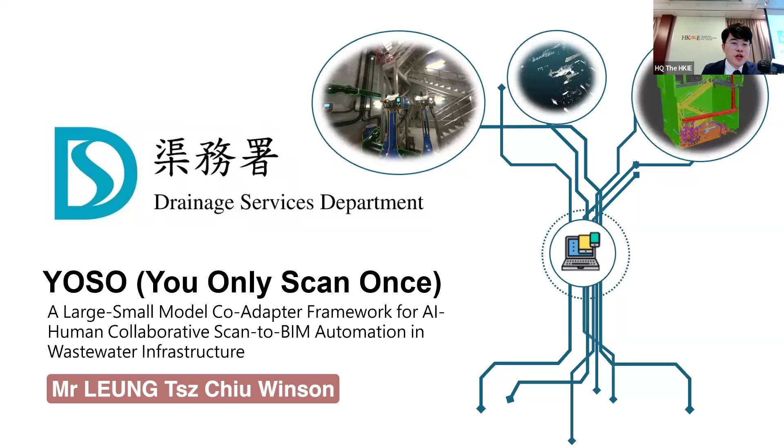So, good evening, everyone. I'm Winson Leung, an electrical and mechanical engineer from the Drainage Services Department. It is my honor today to introduce our innovative framework, YOSO, which stands for You Only Scan Once. It is a large small model co-adapter framework for AI-human collaborative scan-to-BIM automation in wastewater infrastructure.

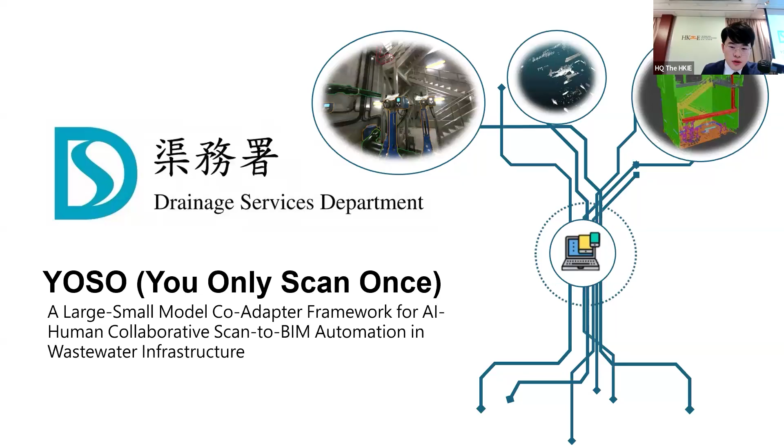Today's agenda will be divided into mainly 4 sessions. First, I will briefly introduce the background and the motivation behind this research, together with some insights from the literature review. Then I will explain the methodology, how we developed YOSO, and the key technologies involved. Then I will present the results and some findings from our field application, and finally the conclusions.

Why is DSD so interested in BIM development? In fact, DSD manages an extensive sewage network and drainage system of over 4,800 kilometers in Hong Kong. We also manage more than 370 plants across Hong Kong. Managing such a vast and complex system requires tremendous resources and manpower, so improving efficiency is one of the top priorities of our work.

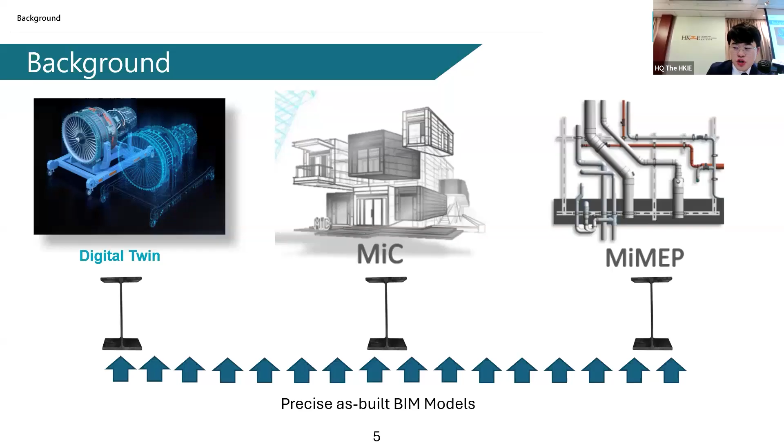To enhance efficiency, we have explored different approaches, for example MIC or MiMEP to facilitate our replacement and upgrading works. More recently, we also introduced digital twin technologies to enhance our operation and asset management efficiency. But all these technologies share the same thing: they all rely on BIM models. Yet producing these precise BIM models is often time-consuming and heavily relies on manual work.

Once segmentation is completed, the grouped points are connected together to form a mesh model, representing the shape and surface of each object. Finally, we enrich the model by adding attributes to transform it into a real BIM model. To sum up, while the Scan-to-BIM workflow is effective, its main bottleneck lies in the manual segmentation part.

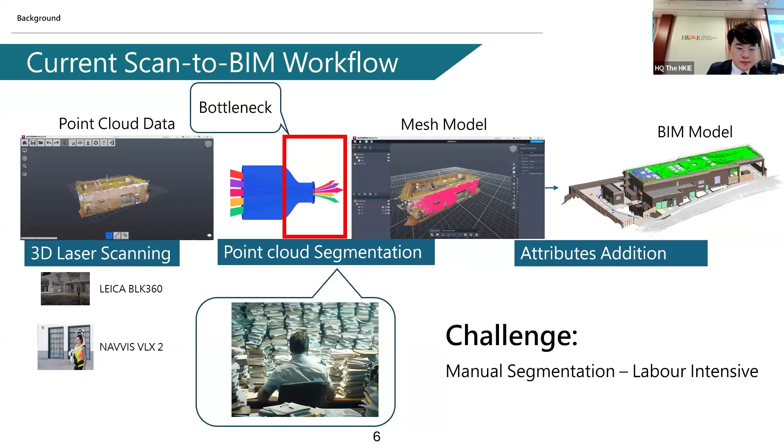Second, the workflow is fragmented. Current research focuses on the AI algorithm and lacks a seamless end-to-end workflow, making it difficult to scale and automate in practice. Third, many of these models are not adaptive. For common objects like chairs or tables, there are millions of open sources on the internet available for training. But for our domain, with limited datasets, the model must be continually refined and updated with real domain-specific data to maintain accuracy and performance.

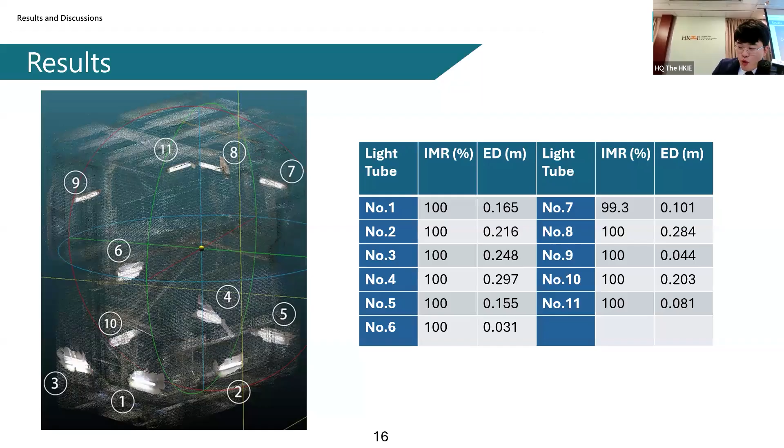Based on these two metrics, we now present the YOSO results. The left-hand side image displays the BIM model of the light tubes generated by the YOSO framework, while the table on the right-hand side presents the corresponding analysis results based on the IMR and ED metrics. As shown, all 11 light tubes have been successfully segmented using the YOSO framework and clearly illustrated in the BIM model on the left.

So that means the IMR of the manual modeling is 100%, and the ED is equal to 0 meter. In this study, we focus on the light tubes and the gate valve first because they have the largest sample size, and they represent two critical extremes in the infrastructure: standardized geometries and irregular geometries. As we can see, the light tubes achieve nearly perfect geometry completeness. We can see the mean value of the IMR is almost 99.9%, but it has a little bit higher positional error there.

It may be attributed to environmental noise, such as light diffusion on the reflective surface. On the contrary, for the gate valve, it does have relatively lower IMR results, but the positional accuracy is relatively high. It may contribute to its nature.

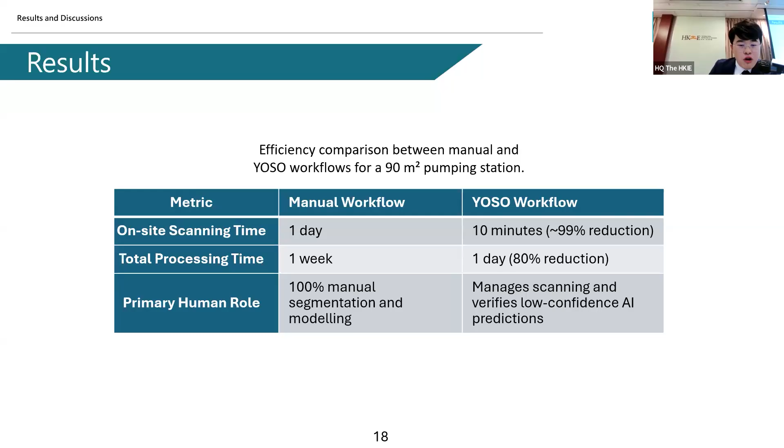Here we go to the conclusion. Although our YOSO framework was initially developed for wastewater infrastructure, its design is highly scalable across the industry. It can be applied to construction sites, industrial plants, and other asset-intensive environments - anywhere that large-scale spatial data needs to be transformed efficiently into intelligent digital models.

Most importantly, YOSO delivers significant efficiency gains. It dramatically enhances the speed, accuracy, and scalability of the entire Scan-to-BIM workflow, substantially reducing reliance on manual modeling and bringing us one step closer to truly automatic, data-driven digital transformation in infrastructure projects.

Looking forward, our next steps focus on two main directions. First, the workflow enhancement - we aim to further refine the pipeline to improve the prediction accuracy and model robustness under a variety of situations, including more complex geometries or environmental constraints.

Second, the AI-powered model completion. We plan to explore advanced AI techniques that can intelligently reconstruct the missing geometry when scanning data is incomplete. This moves us closer to achieving what we call perfect BIM reconstruction, even under less than ideal scanning conditions.

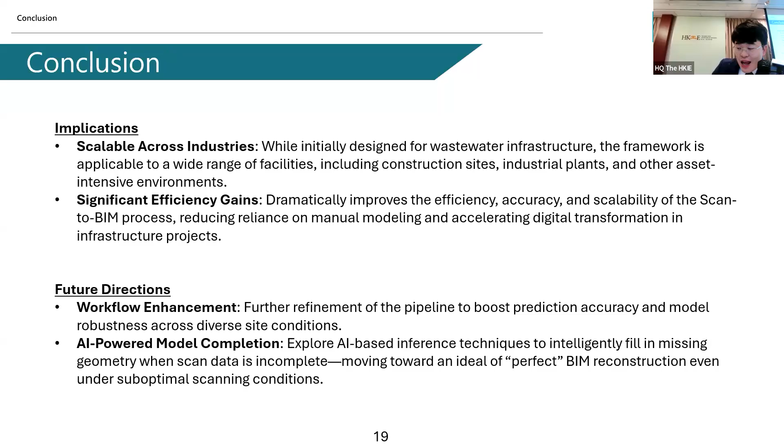And finally, I would like to take this opportunity to say this project represents not just my own work, but a collective effort of a dedicated team. I would like to thank all my teammates, Vasco Wong, Simon Lai, Kerry Jan, Paul Lam, Aaron Chin, Leo Wen, and our supervisor, TK Wong. Of course, also the judges for their invaluable comments throughout this journey. Thank you.

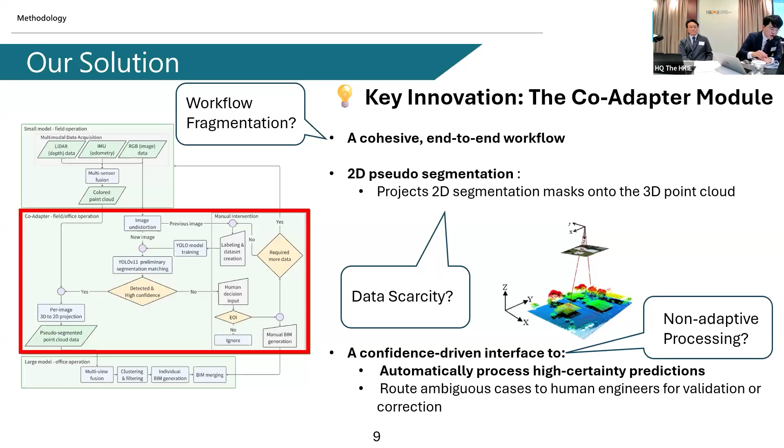For the second question, I'll try to answer it concisely. I think our innovation is that we are not trying to develop every single step or module, or drill into a very sophisticated AI module. What we are doing is integrating all market-available devices and technology together to perform a unified workflow.

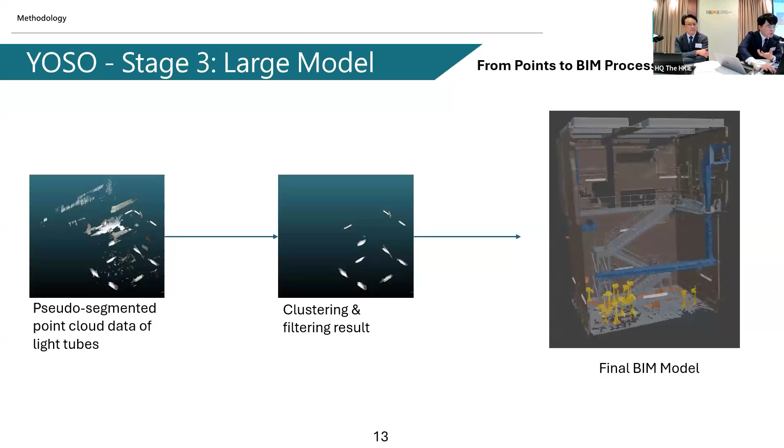But during this, we found that since this is a new framework, there's no metric to evaluate our success. That's why we abandoned the two existing metrics, point-level accuracy and intersection over union, and proposed two new metrics, IMR and ED, to better evaluate our results. These two metrics are applicable to the MiC and MiMEP projects, because IMR refers to the completeness of the component, and ED refers to the positional fidelity.

These two elements are really critical for the BIM model, so that we can have a clash-free installation in the future. I think this is one of our innovations in this project.

And the last one is about the cost. To be very honest, this is not the scope of our research, but I understand that the major cost of the current Scan-to-BIM workflow is the labor cost. So we can simply transfer the time saving into cost saving, and that's the percentage of our cost saving. Thank you.

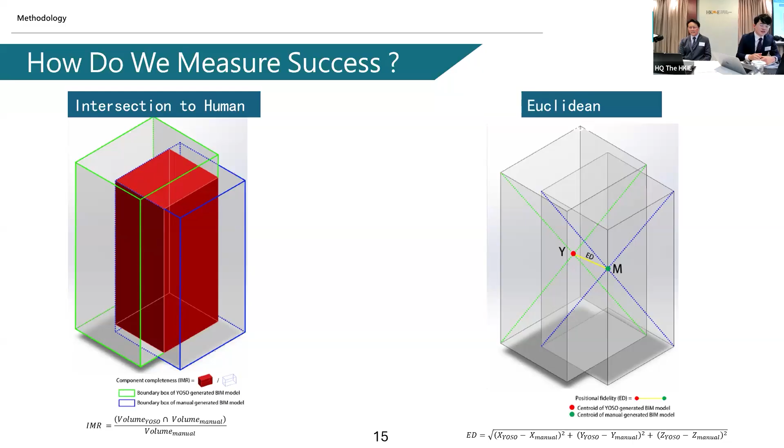Okay, one. Can you go back to the slide showing the accuracy measurements, please?

Thank you for the question. I think we can think about this from this angle. First of all, we have to say that our framework is not meant to develop a very precise model for object detection. Our major work is to test whether the framework, the pipeline, is feasible or not. No matter if the result is good or not, the major output is whether we can use this framework, this pipeline, to generate the BIM model.

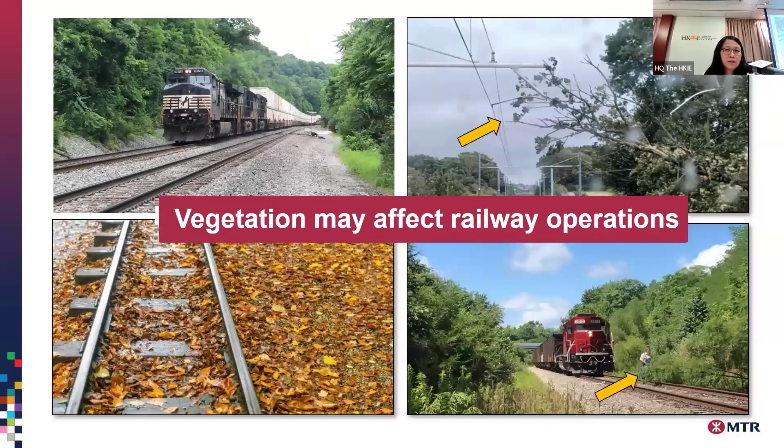Traditionally, we mainly rely on visual inspections. Another means is employing external arborists to carry out professional surveys on each tree along the network. The strategy has been quite traditional and classical, but it's tedious, reactive, and limited. It's not easy for one to master the whole network, and it's hard to know the condition of trees in a network-wide manner.

Here's a view from the train cab during a routine inspection. In the traditional way, our maintenance team conducts regular train rides to spot intrusions by eye, based on their own experience. It's particularly challenging in light rail because the environment is very complex. Also, trees are living things; they grow. And when you inspect them, it's particularly sensitive to environmental conditions like rain and wind.

And trees are monitored for growth and health. We do tree pruning for high-risk cases. However, covering such a large area is very time-consuming, and practically the implementation can be affected by external factors like fog, rainstorms, and also distractions during inspections. And it highly depends on one's own experiences.

So to sum up the key challenges on vegetation management, there is a high demand for human resources for regular inspection, and it ties up staff for frequent inspection and man hours. It's tough to accurately gauge distances from tree to track because it purely relies on one's own judgment on site. And on site, practically, it requires repeated train rides if we wish to verify a particular location.

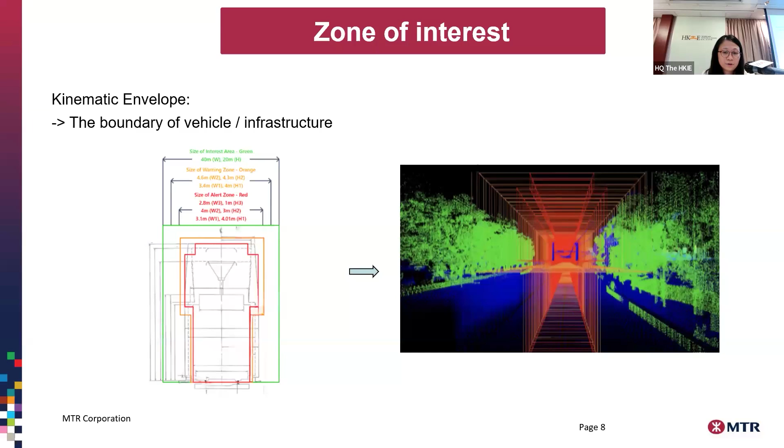So here I will introduce a bit the detection process and the workflow. All the point cloud data collected by the LiDAR are time-stamped, and then the point cloud map is generated into a 3D model through SLAM. And then we have the tree identification model. And after that, we would carry out the intrusion detection, followed by some evaluation.

Basically, the detection process primarily starts from the conversion of the 3D map into 2D rasters. We identify trees from the 2D rasters in a bird's eye view and then project back to 3D. And during the data training process, the trees are manually labeled and further augmented through a pipeline in order to carry out the data training to achieve a better precision.

The system then carries out intrusion checks for trees only within the region of interest that intrude the defined frames. And eventually, the evaluation includes metrics like tree heights, volumes, and distance from tracks, which I will cover in the next slide. And all these results are presented in a meaningful manner through an MMI. So here, I will briefly talk about how we evaluate the risk of a tree and how we carry out the trend analysis.

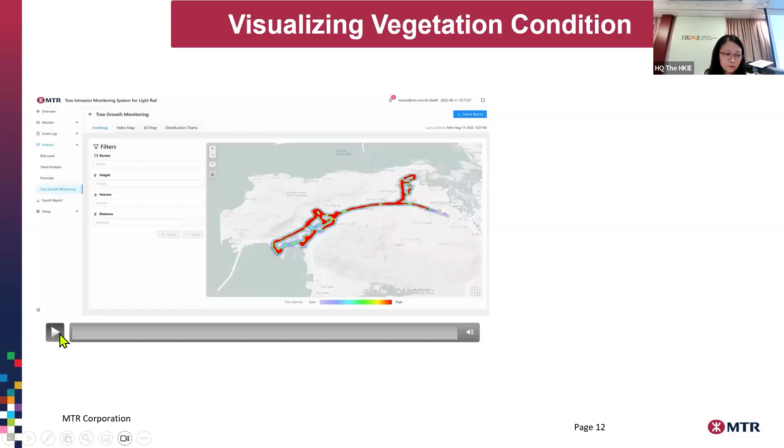So basically, this project transformed very traditional vegetation management into a more centralized and more scientific way. So, okay. Traditionally, data was fragmented; now we have a centralized platform to oversee tree conditions in the network. We have used the H/D ratio to quantify the trees, and we use some risk scores specially designed for the network. We can have heat maps and time series trend analysis.

We can further group parameters using simple mathematics into different indexes for intuitive dashboards to prioritize risk zones and trees. And what's more, users can visualize the conditions in a network-wide manner to gain a feeling of the overall condition for better planning. This is particularly valuable, especially for a network of over 5,000 trees.

And this project has acquired a short-term Hong Kong patent and received various positive results in different local and international competitions and expos. And more importantly, we gained very positive feedback from the frontline users. And this is the most valuable, because we always think that bringing technology to the frontline is rather difficult. We are very happy to know this system can assist their daily maintenance work, assist their planning, and reduce some of the manual effort in cab rides.

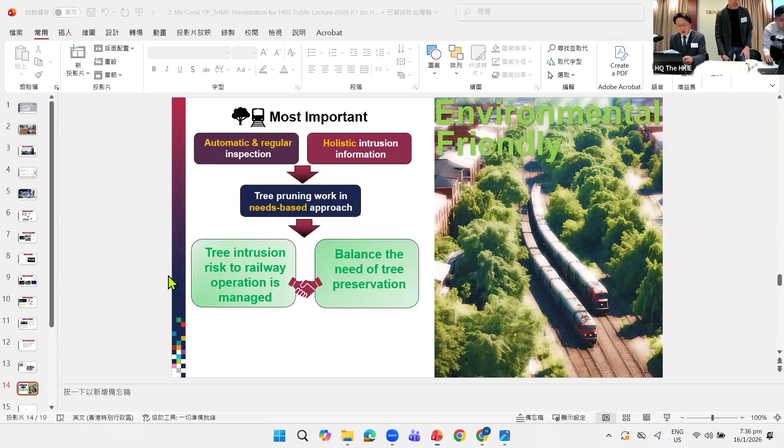Now let me introduce our awardee in the mechanical category, Mr. Zheng Yong Jasper. Mr. Zheng is a senior consultant at the Hong Kong Productivity Council on new industrialization and is an Industry 4.0 implementation consultant accredited by the Fraunhofer Institute for Production Technology. He will present his award paper, Gamification and Digital Twin, a synergistic approach to enhancing manufacturing processes in Industry 4.0. Let's welcome Mr. Zheng.

Today's topic is mainly about gamification and digital twin, combining these approaches to enhance the manufacturing process in Industry 4.0.

But at the beginning, I'd like to talk about Industry 4.0, since many people talk about it, but I'm pretty sure not many have seen the actual definition. Here is the background: it was initiated in 2011 and formally defined, and a report and deployment strategy was submitted in April 2013, led by the German Academy of Science and Engineering.

There are main key stakeholders and also some R&D institutes. The key stakeholders include private sectors like Trumpf for laser technology, BMW for automotive, HP for 3D printing, Festo for pneumatics, and ABB and Siemens mainly for industrial automation. The major R&D institute includes Fraunhofer.

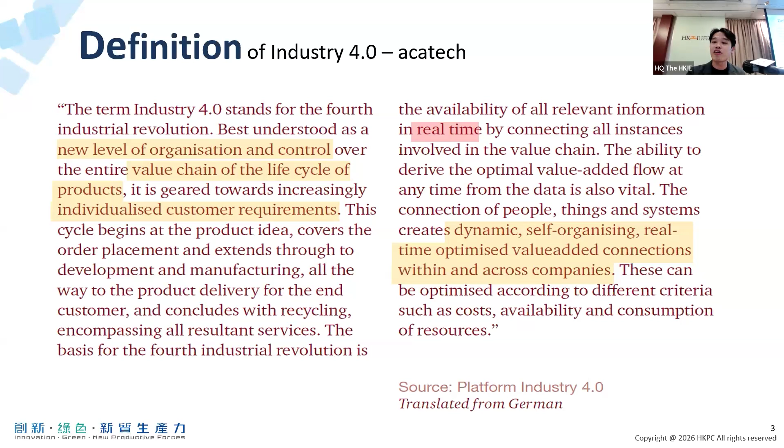Here is the actual definition of Industry 4.0. It mainly includes a new level of organization and control across the whole value chain and life cycle of products, creating dynamic, real-time optimized, value-added connections within and across companies.

In a nutshell, what is Industry 4.0? It's not purely about automation. We're not talking about robotic arms or non-standard automation systems. We're talking about using data to generate outcomes and value added. Simply put, automation is releasing your muscle power, but Industry 4.0 is releasing your brain power by using data autonomy to generate other value.

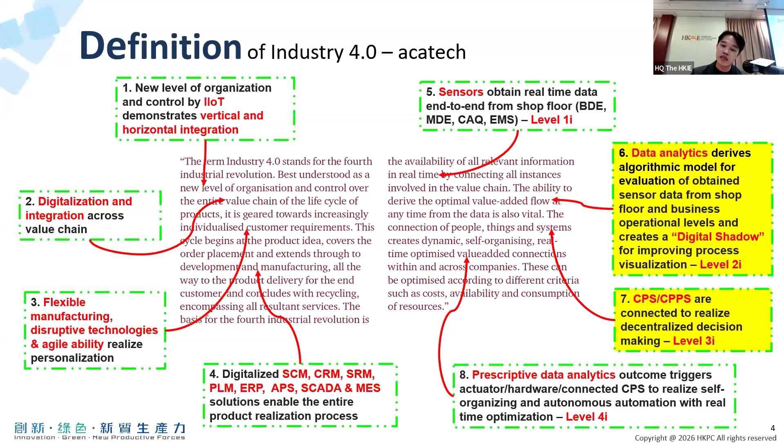Here are some problems in this area. The first is skill gaps: 65% of advanced manufacturing firms in the GBA rely on external experts for digital and automation systems. In Shenzhen, vocational institutes graduate approximately 20,000 students annually in manufacturing-related fields, but local factories require 150,000 skilled technicians.

Another problem is engagement. People, especially young people, don't like manufacturing fields. Only 28% of frontline workers in Guangdong province reported high engagement.

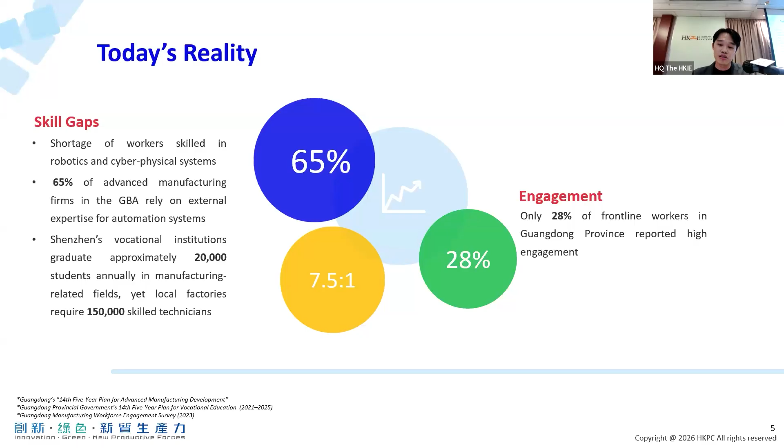So we thought about what future manufacturing might look like: imagine a factory where operators wear VR and AR headsets, collaborating with AI. We think gamification combined with digital twin can help solve this problem by generating a resilient, dynamic, human-centric environment to help workers and accelerate innovation.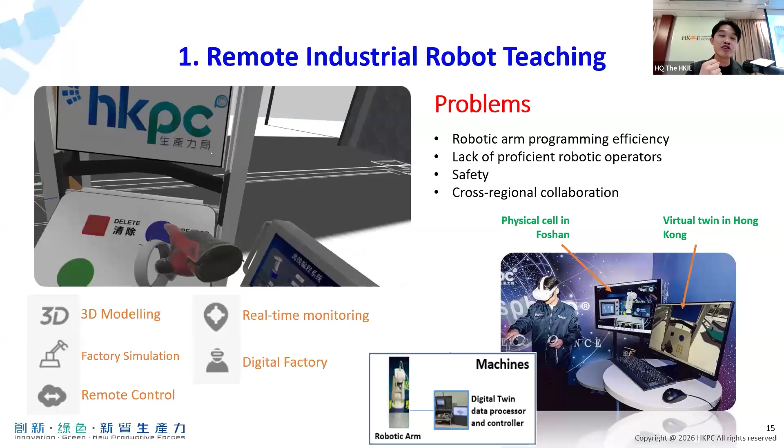So if we would like to make the robotic arm program more efficient, we try to implement the virtual twin to help solve this issue. Also, a lot of the small and medium-sized manufacturers do not have a skillful programmer for the robotic arm, so we try to use this idea.

You can see here some video showing the physical side is in Foshan, and the virtual twin is in HKPC in Kowloon Tong. We try using the VR headset and also the treadmill, and then we can simply program the robotic arm by drag and drop.

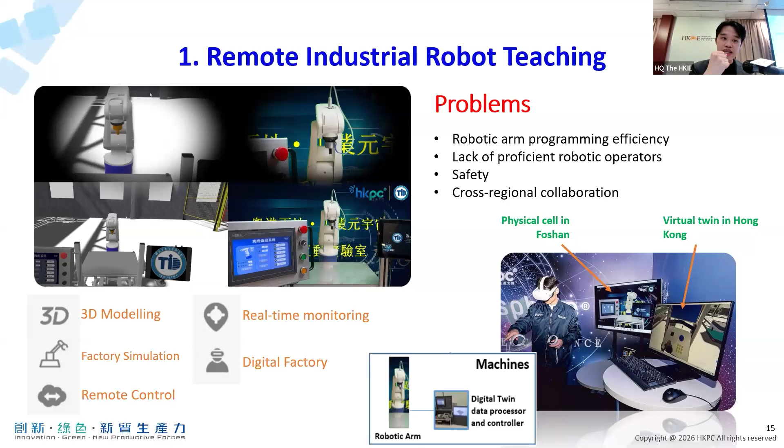So this has different benefits: enhance safety and reduce the downtime. We can change over faster and also increase the collaboration efficiency, and also have another advantage about the lab to bulk, since we just need one skillful robotic programmer in Hong Kong, and then we can control many physical cells in different places, like maybe some physical cell is in Foshan, some in Dongguan, some maybe in Germany. We can easily do this using just one professional person.

And also, as I mentioned previously, we have implemented this setup into a 3C accessory OEM factory, about doing the communication device accessory. You can see the figures are really encouraging.

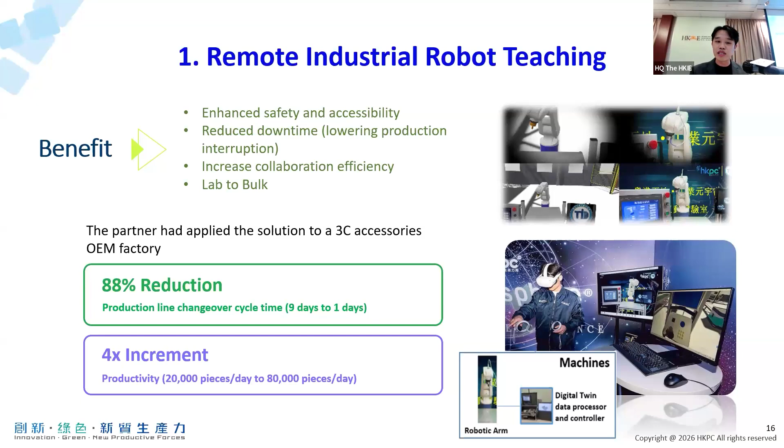88% reduction in the line changeover cycle time, 9 days to 1 day. That means they can have more capacity for production. And also you can see the productivity increased 4 times, 20,000 pieces per day to 80,000 pieces per day. This is really encouraging.

Another example also uses a similar implementation framework, also developed by HKPC. It seems automation these days is really mature, but some working processes are still labor intensive, especially like the garment industry, with manual people.

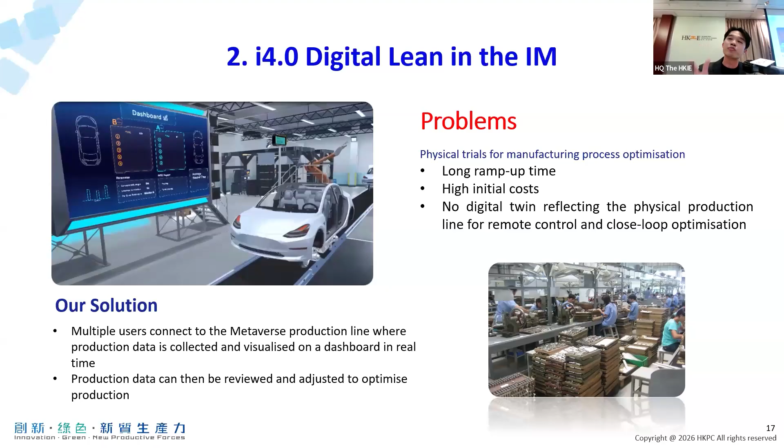So we still need to have people's data to enhance our process, right? So we try to use sensors and also the virtual twin, using different sensors, like the 2D sensor, like the camera, and also like the proximity sensor, and we may also use the 3D sensor to capture the motion of the people. By capturing the motion of the people, we can have the data of the people, the working data, and also by using that data, we can fit it into the twin.

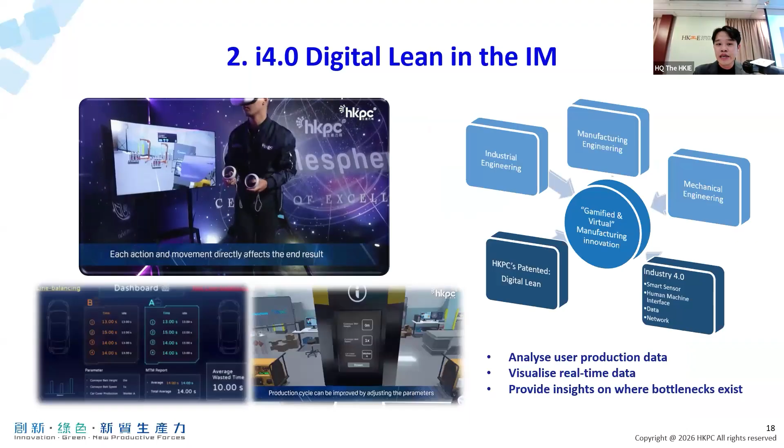We can fit into the twin and then do the simulation with the twin. Then you can see my colleague using the treadmill and the VR headset and doing the working process simulation in the virtual environment. We can use the data.

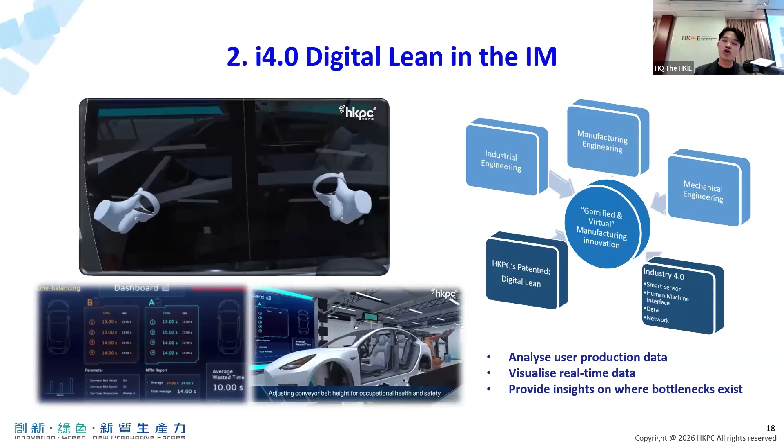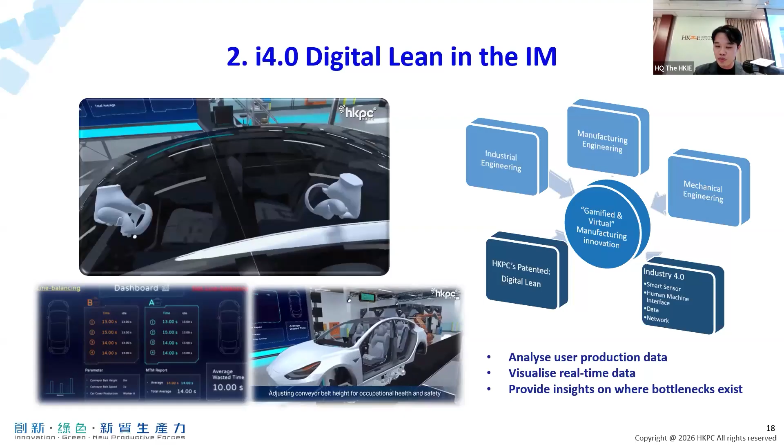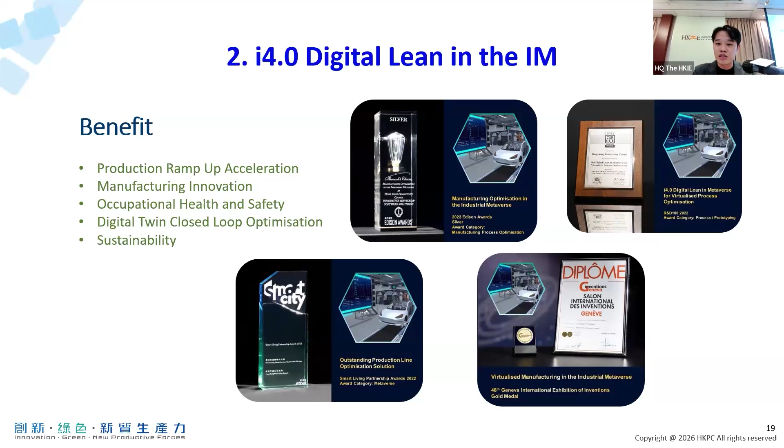And find the bottleneck of different working processes, and then we can provide suggestions for how to enhance this process. This project is really encouraging - apart from helping the enterprise, we also get a lot of local and global recognition, from the USA, from Switzerland, and more.

When we are implementing this technology, there are some challenges - technical challenges. McKinsey, the famous consultant company, shows that 70% of Industry 4.0 pilots fail due to incompatible legacy infrastructure, and also the economics, since building a 3D model is really quite expensive, especially for the digital twin, not purely the CAD model. And also for the human side.

I remember last year in April I went to Germany and presented a similar topic, and an elderly lady came to me and said, Jasper, can this really help us get into the environment again? She mentioned that it's really difficult for elderly people to use the computer, to use the VR headset. I agree that this is really challenging for people - there should be a learning curve for them to adapt to this new technology.

But I'm really happy that the lady also told me it's okay, but that she would like to get into the environment again - she wants to express her value, and she's really willing to try this new technology. So that's my point: right now I'm not sure whether AI can replace people, but I'm pretty sure that people are really the core of the future. So, providing value - I really believe that in the future, some processes will still need to rely on people.